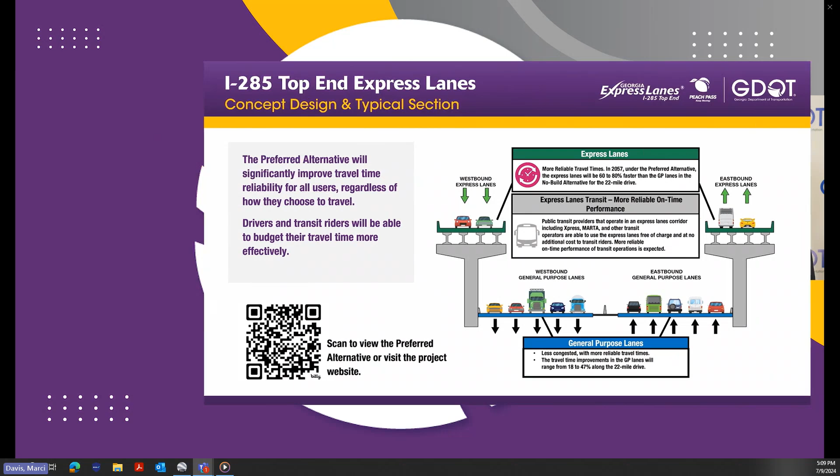As mentioned earlier, the proposed I-285 Top-End Express Lane is part of the MMIP portfolio and will be part of the Georgia Express Lanes network. However, express lanes on I-285 were being considered before the MMIP was announced as part of the Georgia DOT's Revive 285 initiative. Over the years, GDOT and its project team has engaged with local stakeholders and the public to demonstrate and showcase the proposed express lane project.

The project team hosted a community conversation meeting series in 2019, followed by the Public Information Open House series in 2020, conducted insights sessions with local stakeholders, community partners, and businesses, issued surveys for the project team, and have responded to meetings, requests, and public inquiries.

Following the close of the PHOH comment period, the project team will update the EIS document describing the project's potential environmental impact and include your comments and feedback in the EIS for final submittal. A record of decision, or ROD, is the final step to the EIS process and will be issued by FHWA announcing the selected alternative informed by public and agency input. Georgia DOT anticipates final EIS and ROD from FHWA in late 2025. Please keep in mind this date is subject to change.

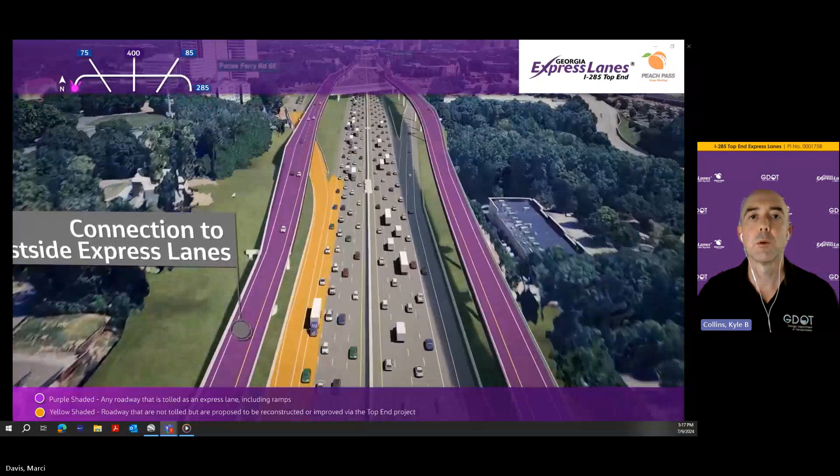What you're seeing here on the screen is a project visual rendering giving you, our citizens, the opportunity to imagine what this could look like and how traffic would flow once construction is complete.

You can view this video in its entirety at your leisure on the project website to specifically focus on your area of interest and track what your commute would be with the new concept if these lanes were built. Please keep in mind that this is still a preliminary design concept. It's not yet final, so all materials you see here are subject to change.

Okay, so as we start to have a few questions trickle in, I'm going to tag our air and noise expert first with GDOT, Miles Kemp, on a common interstate project concern. Miles, we're talking about noise barriers and what, if any, impact this project would have. I believe there's 30 some odd locations that may see some activity on noise mitigation. Could you take us through that process and maybe tour us around that virtual meeting room space as well?

Certainly, Kyle. Thank you, and good afternoon everyone. I'm Miles Kemp, the Air and Noise Section Manager with the Georgia Department of Transportation. First off, I'd like to take a little bit of time to talk about the process for completing noise assessments for projects such as the I-285 Top End Express Lanes project.

As part of the environmental studies that were completed for this project, a traffic noise analysis or noise impact assessment was conducted to determine the acoustic impact of the proposed project for noise-sensitive resources, such as single-family or multifamily residences, as well as public outdoor spaces all along the project corridor.

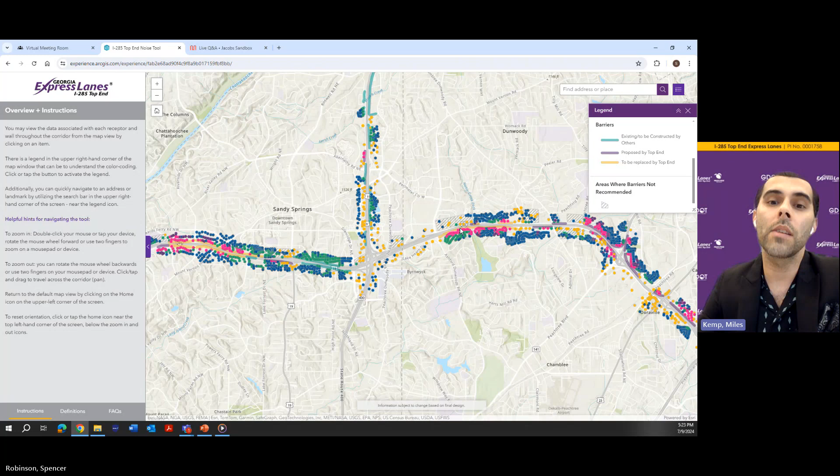But again, this information is subject to change based upon revisions to the project in the future. So if you have concerns about any particular areas, we highly recommend that you submit a comment and call attention to one of those areas.

So with that being said, I don't know that there's really too much more to go through regarding this. However, if you do click on any barriers, you'll generally see what the average height is currently expected to be. But again, it's all tentative and subject to future design revisions.

Appreciate it, Miles. That was a good detailed rundown of that process and the useful noise tool on the VMR that we talked about earlier. A few questions came in while Miles was giving us the run through. First, I'm going to kick this one to our environmental lead who works with Miles, Amber Phillips.

Question, comment: When you say the plans are subject to change, how is the community impacted by these changes notified? So far, communication has been more reactive than active, creating frustrations in our neighborhood.

Thank you for that question. As part of the PHOH effort, we will gather all the feedback we receive from this project and provide a response letter to all the comments we get. That feedback will also be incorporated into the final decision in the final EIS. As we make changes, there may be multiple ways we respond. If there's a change to a neighborhood, we may do stakeholder outreach to that neighborhood, or if you're on the project email list, we can update you with our newsletter, and updates will be posted on the project website. Thank you so much for the question.

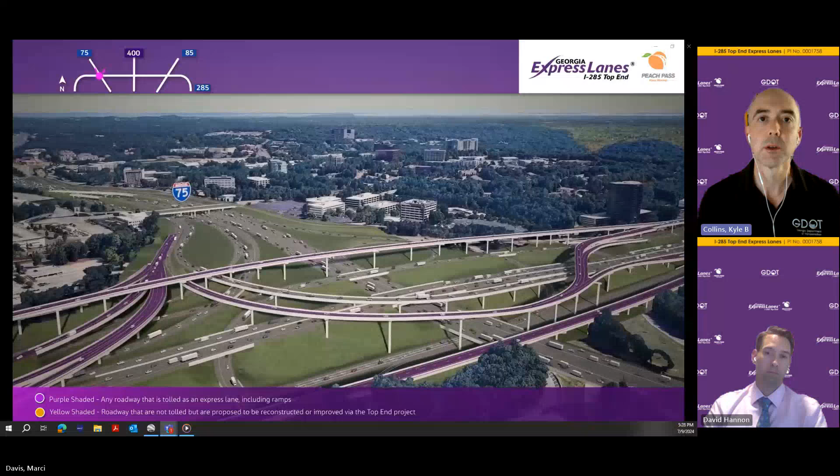Thank you, sir. And at the end of the day, customer service is going to be their main goal. Absolutely. So we're going to go back to Amber on the environmental front.

Amber, does the environmental impact statement address the dozens of trees that were removed for the new bridge at Mount Vernon? Has there been any commitment to replace the trees that were cut down for no apparent reason? The Mount Vernon project currently under construction is not part of this project, so our project does not cover that one.

But as far as this project, we don't specifically account for tree clearing. Tree clearing is done for multiple reasons, such as safety, if a tree falls on the interstate, things like that. However, as part of this process, we are also asking for the public's concerns with mitigation and impacts. If you could respond with different types of mitigation, we can look at whether those mitigations can be added to the project, and if not, we will let you know why we're unable to add them as the project progresses and the final EIS is approved. Thank you so much for the question.

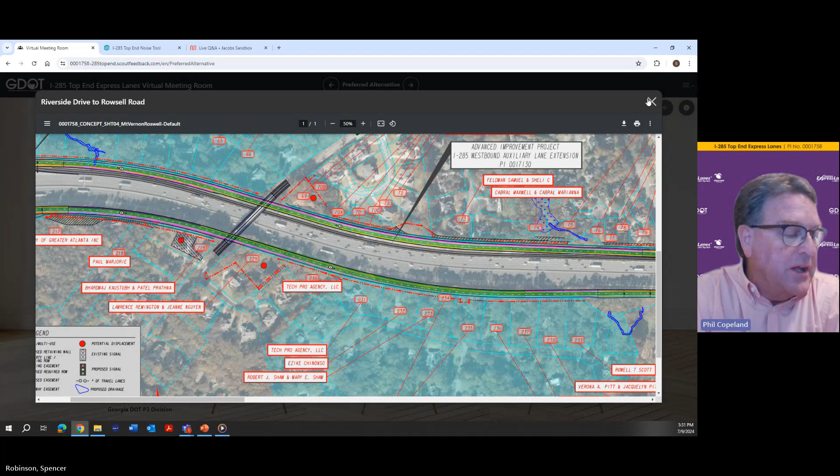Then if you go back to the stations along the top of the web page, you will see a GDOT resource station. Inside that station, there is also the opportunity for you to get an understanding of what the right-of-way acquisition process looks like, as far as the steps that we navigate.

Also on that same page is the right-of-way informational brochure that you can download, and you will see a more narrative version of what happens in each one of those steps, your engagement as the property owner, and the department's engagement with you on how that process takes place.

So again, I would encourage you to visit the concept layouts and then visit the right-of-way station to see the processes that are undertaken. Thank you, Kyle.

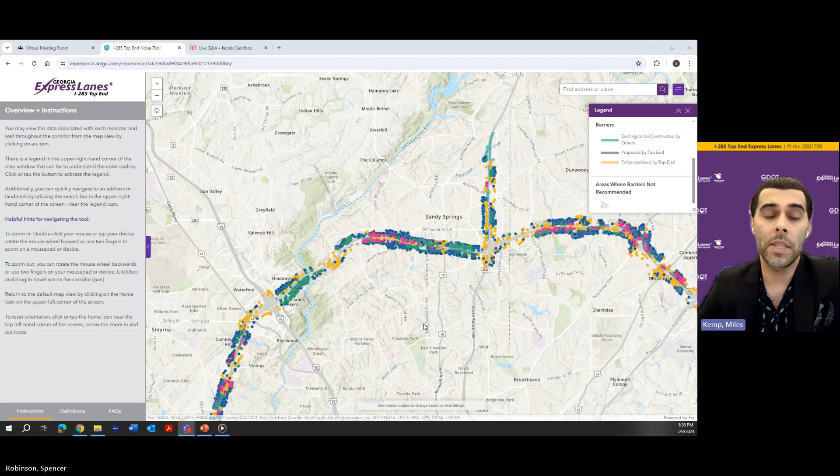Not that it's self-explanatory, but essentially what it's pointing out is that we have identified either constructability or maintenance concerns that are potentially precluding a barrier from meeting GDOT requirements or standards to safely construct a noise barrier. That could certainly be one reason. For this location in particular, we've identified a couple of major concerns, such as having inadequate space to actually install a noise barrier that might be ground mounted. Maybe we wouldn't put it on an existing or proposed structure, we would just install it into the earth. But there are standards and requirements associated with that, and if we can't meet those standards, we don't have a wall that could be safely constructed.

In some instances, we might have a wall that can be safely constructed, but there are limitations on what can actually safely be constructed. And if that's the case, we have to work within those limitations, and that might affect how well that barrier could perform. We do have minimum requirements under federal regulations as far as what sort of effectiveness or performance these barriers should be achieving in order to basically be required for consideration.

We can look further into that specific area. There's a lot to potentially talk about there. When we look at areas where we have conflicts like this and maybe some limitations we need to work within, we'll look at other alternatives. Like maybe there's an existing retaining wall out there that we need to consider mounting a barrier to. But under most circumstances, those existing structures are not designed to accommodate any additional weight or structure that might be mounted to it, so that could also be a very specific problem. Effectively, it means we have identified concerns that are not meeting our GDOT design standards, that are precluding us from saying a barrier can be constructed at that location based upon the current design of the project.

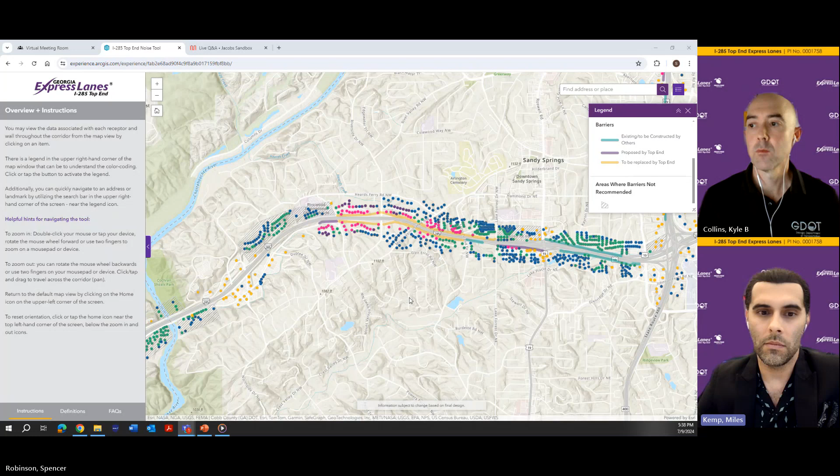And along that same line of the previous question, folks are still kind of curious what that means as far as sound mitigation. So the noise mitigation map says in some areas sound barriers are not recommended. We live along one of those areas - what does that mean and why?

Yeah, and that kind of varies from location to location. We tried to generally identify some of the reasoning for each of those locations where we're not currently recommending barriers, and it varies from location to location. If you want more details, we definitely recommend you reach out, leave a comment. Going through each of those on the virtual Q&A session can take a bit of time, but we can get back to you directly if you want more specific information about a specific location. We also have the full noise impact assessment and more detailed information that the noise study tool and those findings and figures are based on.

Those are all located on the project website. If you go to the homepage, on the project website there will be that environmental tab up at the top. You can click on that, scroll down to, I think it's Appendix 9, if I'm not mistaken. It'll actually be at the main 285 general hub page outside of the virtual meeting room.

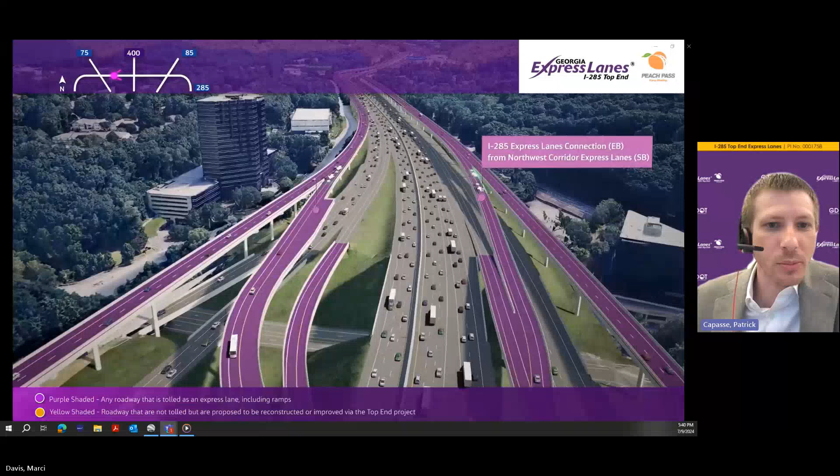Thanks, Kyle. It's awesome to have the opportunity to present this stuff to folks. So what we're looking at on the screen is a 3D rendering of the Express Lane project. Purple is the Express Lane project, anything in gray is basically what's out there today. The legend in the upper left depicts the overview of the whole corridor.

You've got the 75 interchange on the left and the I-85 interchange on the right, with 400 down the middle. That little purple dot indicates about where we are in the world as we're moving along the highway.

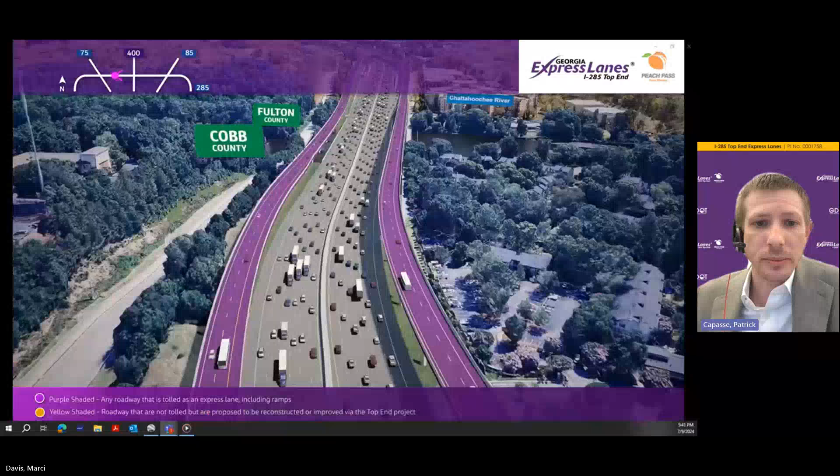So we're approaching the Chattahoochee River here. You'll notice that the express lanes are elevated in both directions, 2 lanes, and we have different access points throughout the corridor as we cross through this.

So you're coming up on an access point here that allows you to get into the express lanes in the eastbound direction or get out of the express lanes in the westbound direction. We call those direct merges, just some terminology for folks.

As we approach the Northside Drive interchange, this is going to go up and over that interchange. That's a separate existing interchange that's out there today. It's going to stay and remain in operation, but we'll just go up and over it with the express lanes.

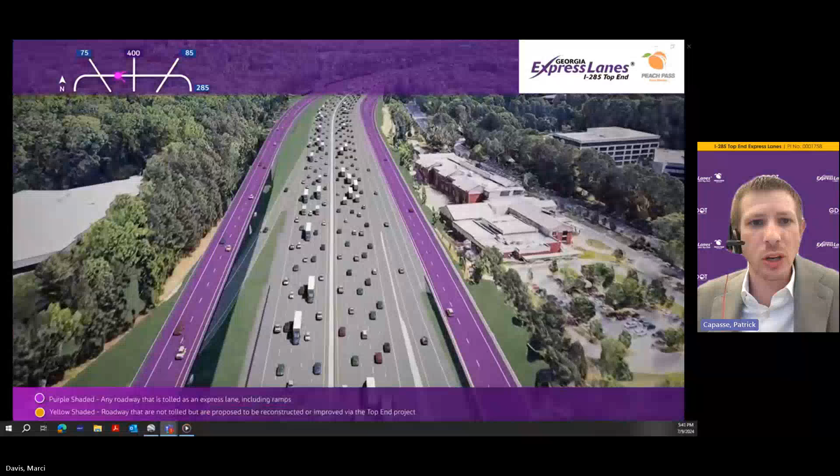As we keep going through here, we'll start to come back down to grade a bit. This is the other half, another direct merge that we're coming up on. Folks will be able to get out of the express lanes in the eastbound direction and get back into the general purpose lanes. They'll also be able to get into the express lanes heading westbound from the general purpose lanes. So we're at grade in this area before we go over the Raider Drive overpass at the top of your screen.

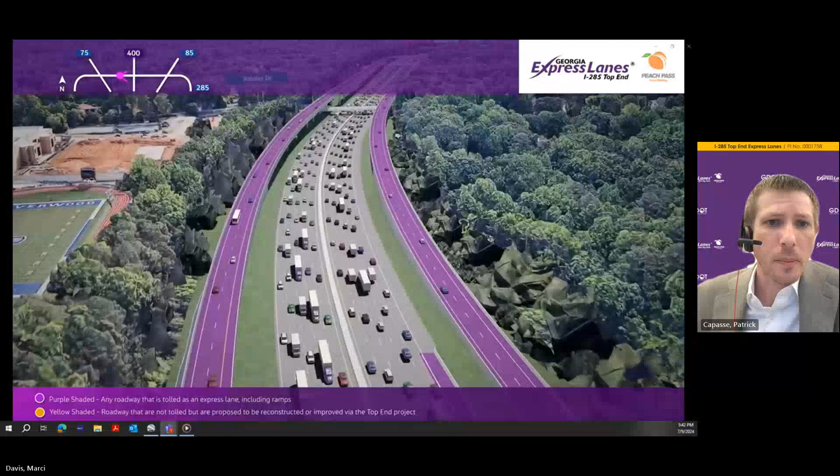And then we're about to approach the Riverside Drive area as well as the Roswell Road area. We'll go up and over those interchanges as well.

In this area, we'll go back underneath Mount Vernon. There is a project out there under construction right now - this is the 0017130 auxiliary lane project to replace the Mount Vernon Bridge. That bridge was replaced with the intention of allowing extra space for the express lanes to go underneath them. As soon as they go underneath that bridge, we'll head up again and head over towards the very complicated 285-400 interchange as we cross over Roswell Road.

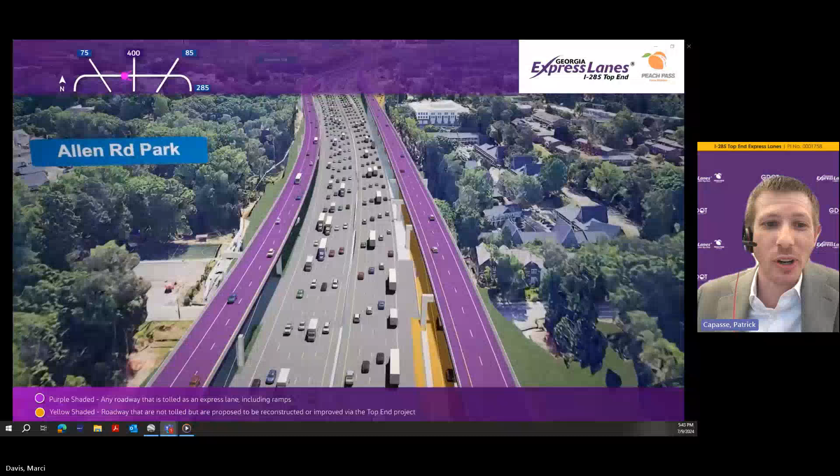On the left here is a notable park - this is Allen Road Park. We're anticipating no impacts to that park right now, so it's just a win for the project. We're able to completely stay off of it.

And then as we're approaching Roswell Road, these are the general purpose lanes that you see here on the screen. This is pretty reflective of what's just been constructed with the Transform 285-400 project that's out there today. They're just wrapping up that construction imminently, and the purple lanes will go basically in a space that's been preserved for the columns for the express lanes.

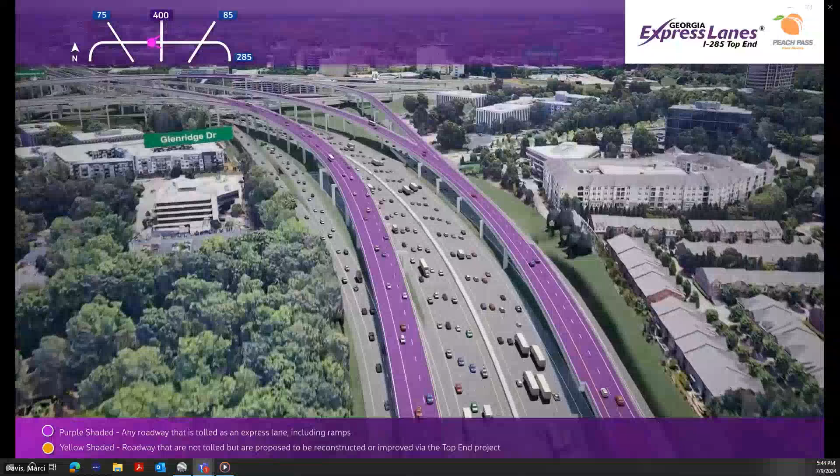And then as we make the turn as the approach to 285-400, we're looking south now. The camera's going to pan, look at Glenridge Drive. That bridge is proposed to be replaced with 2 egress and ingress ramps. We call them terminal ramps to the express lanes that will be on 400. Users will be able to get into the express lanes and head north.

So the camera's going to pan and turn, and we'll be able to follow it all the way up north as we tie into the 400 express lane projects.

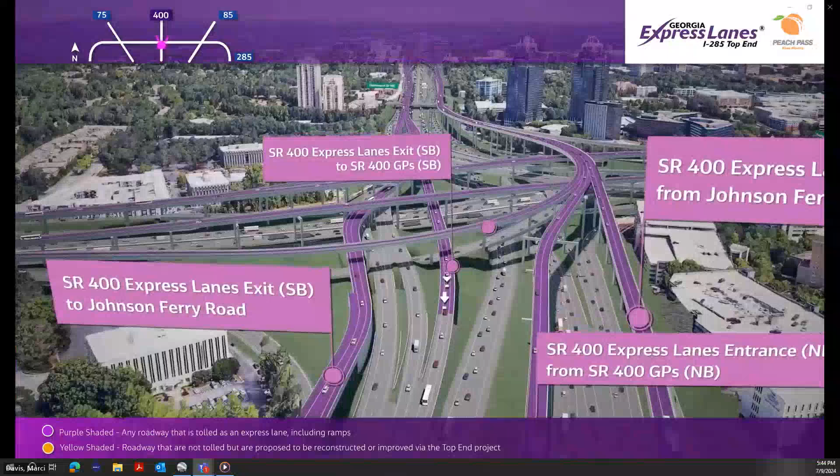Again, you'll see access roads to Johnson Ferry as well. On the right side of your screen, there's the entrance ramp heading north, as well as the southbound exit ramp to Johnson Ferry. Those are direct access ramps, or DARs, to get into the express lane system, and those only serve 400.

And we're heading north now, past the King and Queen building on the right, and up and over Hammond Drive.

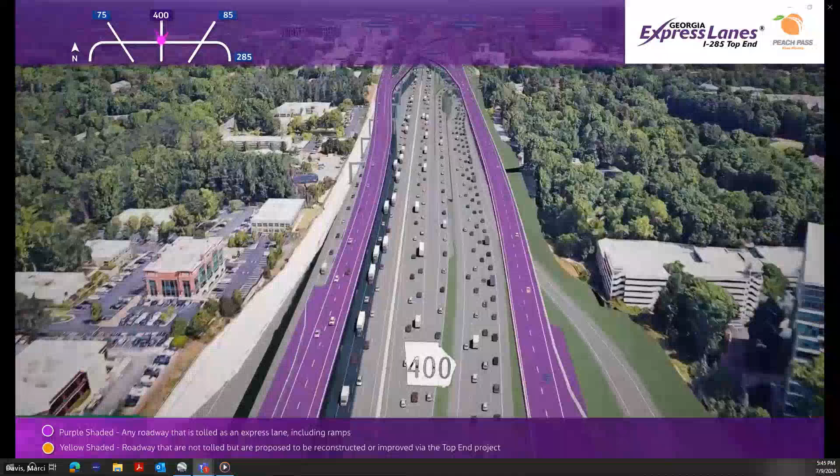Now we're approaching Mount Vernon interchange, another direct access ramp that serves the local network. Users will be able to get in at Mount Vernon and head south. Then we're just about at the northern terminus on 400, where we tie into the express lane, the 400 express lane project. That project's not shown on these graphics, but the two projects do tie together right around the North Springs MARTA station.

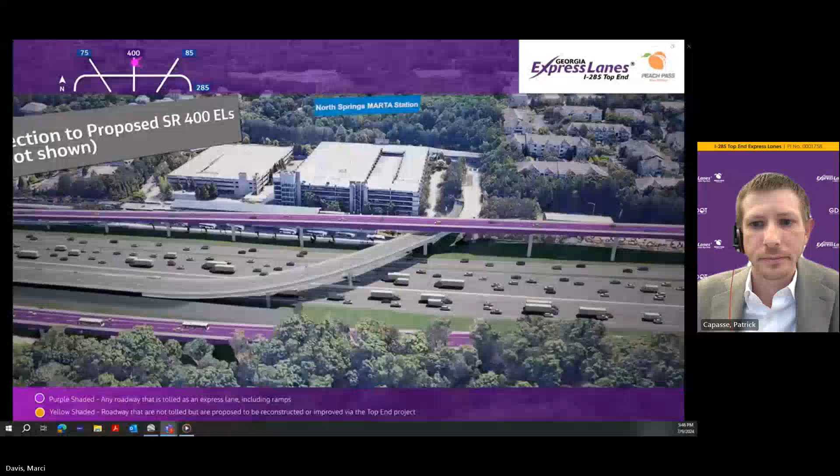While we're going through this video, Patrick, a question came in related to the elevated lanes and the height. What is the approximate height of the elevated lane between Riverside and Powers Ferry? It doesn't seem like a sound barrier. The proposed 30 feet would do much to dampen sound for a lane that appears to be close to 30 feet in elevation. Well, that's an excellent question.

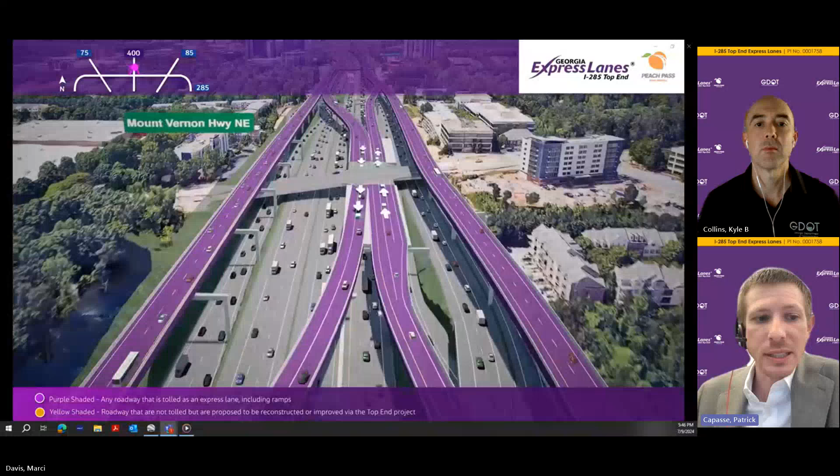As the video showed, we're about 50 to 60 feet above the existing general purpose lane elevation because we're going over Riverside. But we actually get more abatement by putting a ground mounted barrier to protect against the noise that's generated from the general purpose lanes. 18-wheelers will not be allowed in the express lanes, so the noise is significantly less, but we get more abatement and better benefit by putting a ground mounted sound or noise barrier to protect against noise.

Awesome. Thank you for that.

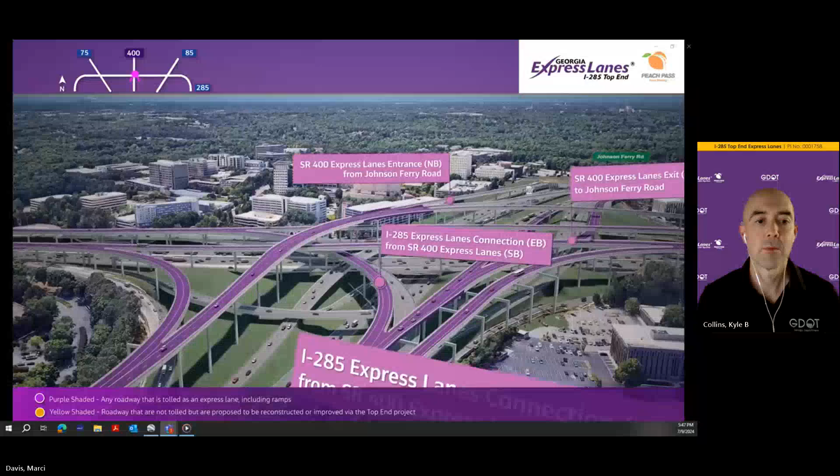So a few more questions that have come in. I'm actually going to answer this one. What's the PI or project information number for the express lanes on 400 outside of 285? Well, that particular PI is 0001757. So you may have heard some discussion of the planned express lanes up north in the 400 corridor from basically where this project leaves off heading into Forsyth County.

That's currently in active procurement. We've actually just opened 3 bridges in advance of that project as well, delivering some local road improvements to City of Sandy Springs with 2 bridges at Roberts Drive and Pitts Road, and also up in Alpharetta. So those have gone well, multimodal aspects tying into aesthetic packages with both of those local governments. We've had a good working relationship with them, and that's some good positive, on schedule or ahead of schedule openings that we've recently had.

Georgia DOT Project Manager for the P3 Division. I am glad that you could join us today to learn more about the proposed I-285 Top-End Express Lane project, PI number 0001758. Let's get started with today's presentation ahead of our virtual question and answer session.

The northern half of I-285 is one of the most heavily traveled and congested interstate highways in the United States. More than 240,000 vehicles travel across this stretch of highway every weekday. The proposed I-285 Top-End Express Lane project is part of a larger effort to improve traffic flow and provide reliable trip times on our Metro Atlanta interstates.

Instead of continuing to build general purpose lanes that will continue to fill up with vehicles, the Atlanta Regional Commission and our State Transportation Board adopted express lanes as a solution to manage congestion in Metro Atlanta and to provide reliable trip times as more people and businesses move to the region.

Express lanes are optional, price-managed lanes that complement the existing interstate in some of the most congested corridors around Metro Atlanta. You don't have to use them, but motorists and transit customers can take advantage of the lanes to bypass congestion for a free-flowing trip.

And that's right, I said it, transit customers. Georgia express lanes are considered transit lanes, supporting opportunities for existing transit services and inclusion of new transit opportunities along the I-285 corridor. Express Lane Transit, or ELT, allows public transit providers that operate in these corridors, including Xpress, MARTA, and state-registered van pools, to use the express lanes free of charge.

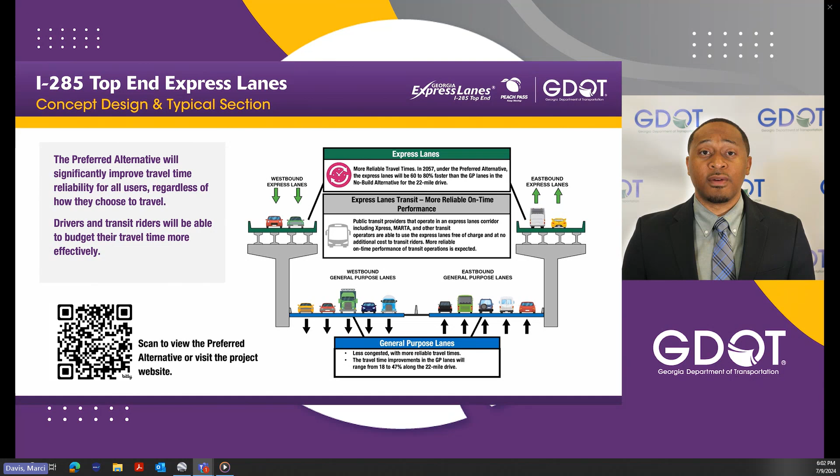As mentioned earlier, the proposed I-285 Top-End Express Lane is part of the MMIP portfolio and will be part of the Georgia Express Lanes network.

However, express lanes on I-285 were being considered before the MMIP was announced, as part of the Georgia DOT's Revive 285 initiative. Over the years, GDOT and its project team has engaged with local stakeholders and the public to demonstrate and showcase the proposed express lane project.

The project team hosted a community conversation meeting series in 2019, followed by the public information open house series in 2020, conducted insight sessions with local stakeholders, community partners, and businesses, issued surveys for the project team, and have responded to meetings, requests, and public inquiries.

Following the close of the PHOH comment period, the project team will update the EIS document describing the project's potential environmental impact and include your comments and feedback in the EIS for final submittal.

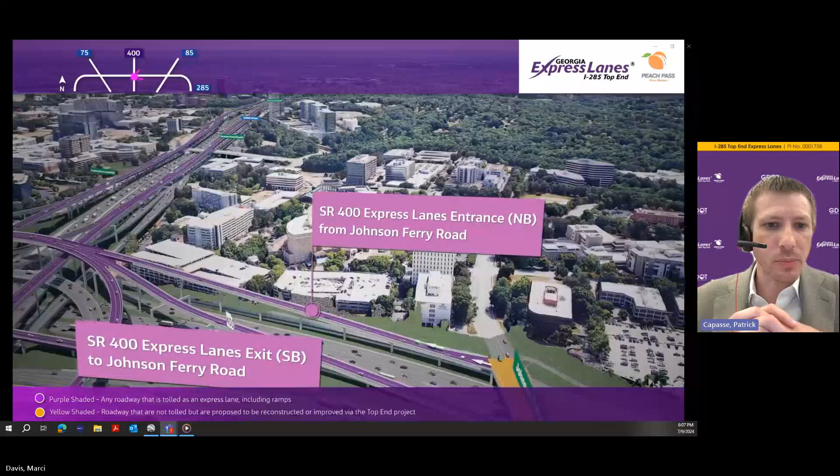We're heading, looking towards the east here. We're just above the Johnson Ferry access point, and you see those two direct access ramps in the lower part of your screen connecting to Johnson Ferry. Then you'll also see in the middle of the screen there's a lane heading northbound that'll get you into the express lanes from the general purpose lanes on 400, as well as an egress from the express lane system back to SR 400 southbound.

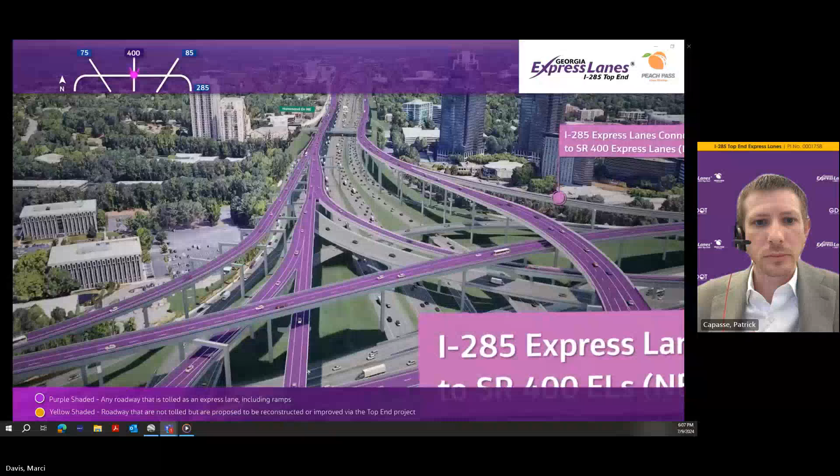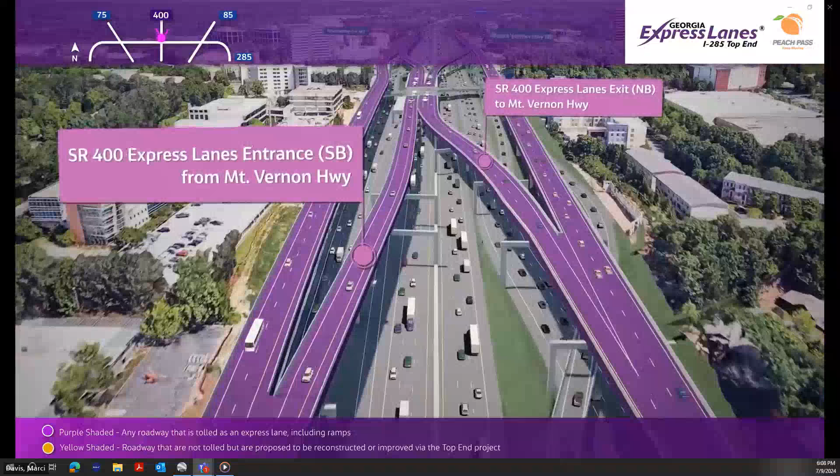As the video was pulling up, we just still didn't anticipate 400 to be widened any further than it was already widened under the Transform 285-400 project. So all of the columns you see, all of the straddle bents and the elevated lanes, will be built on existing right-of-way, sort of shoehorned within the median.

And then Kyle, we'll keep letting this play for a little while, and we'll head towards the eastern part of the project as it comes back down south from the top.

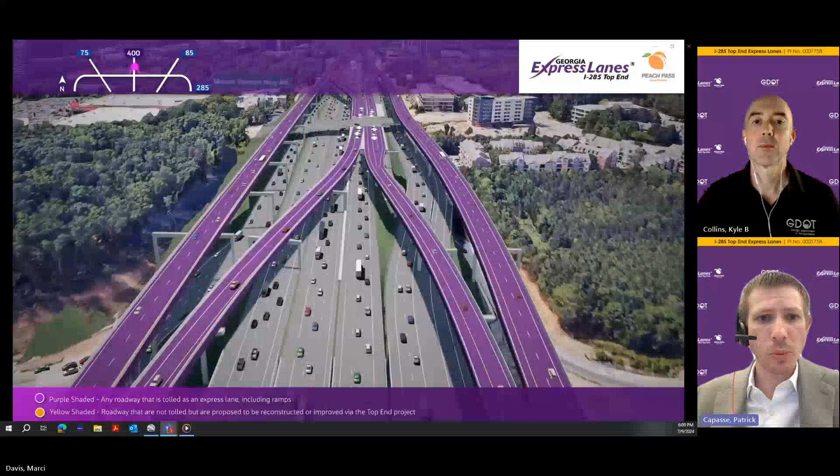Now we're heading south, so cameras turned 180 degrees, and we're heading back south now towards 285-400, towards that interchange. Again, approaching here is the Mount Vernon interchange, the new proposed access point there. As we head south, the camera will turn and pan to the west, then the east, as we go around the King and Queen building.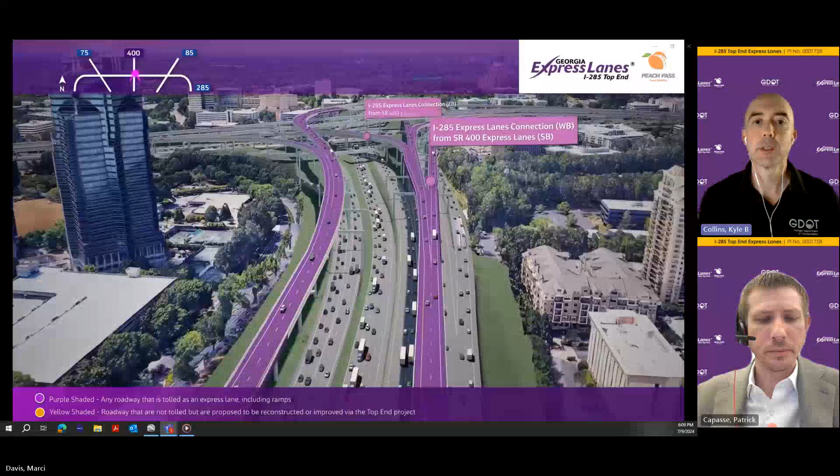And Patrick, while we're going through this, one of the questions was on the noise front. Folks see these proposed elevated express lanes in both directions. The question was, do I understand you correctly when you state there will be no noise abatement for elevated roads? We may bring in Miles on this too, but wanted to give you first crack at it.

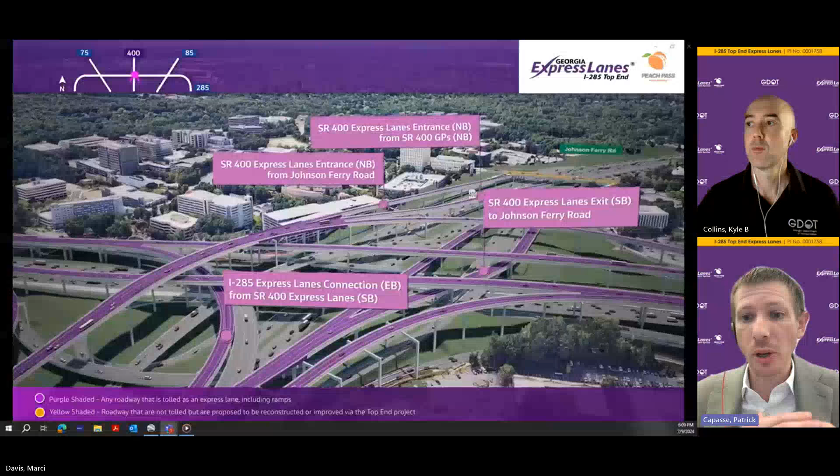No, I think that's a great question. We do get more abatement, as we studied it, from putting a ground mounted barrier. That doesn't mean you can't put a noise barrier on the elevated lanes - it just means we actually get more benefit by mounting them on the ground. Miles can talk a little bit more about that process and how we've analyzed it, but that's generally what our studies are showing.

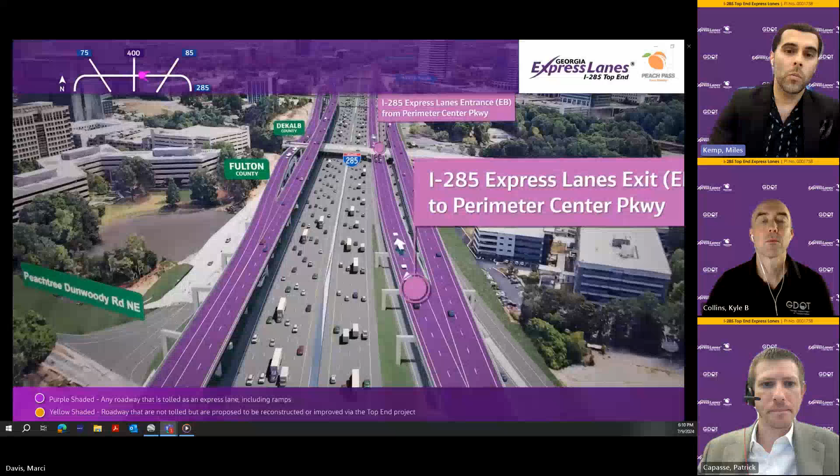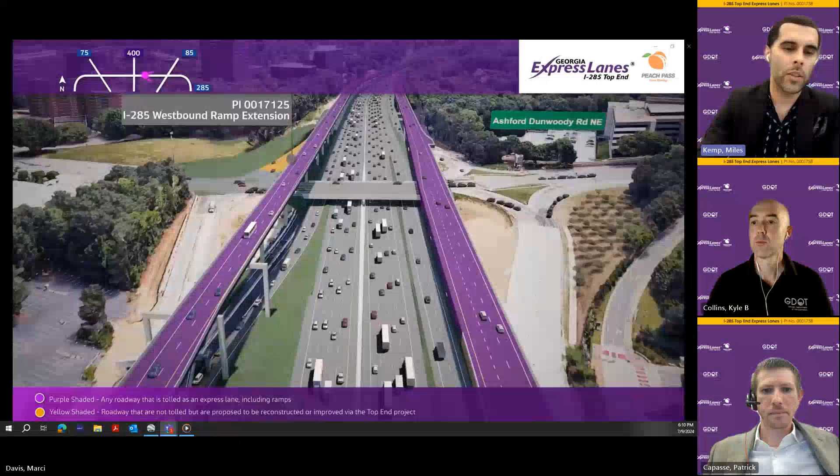Thanks, Patrick. I'm happy to jump in there and expand on that a little bit. The modeling completed for the project included the elevated express lanes and additional things that might affect how traffic noise is emanating both from existing I-285 and those elevated express lanes. Part of that was consideration of whether those elevated express lanes have a direct line of sight to adjacent noise sensitive properties like residences. And part of it, what we looked at early on, was the currently expected design for those express lanes and the kind of sidewalls that would likely be included along the sides, which in some way is contributing to some reduction or blockage of that line of sight to those nearby noise sensitive properties.

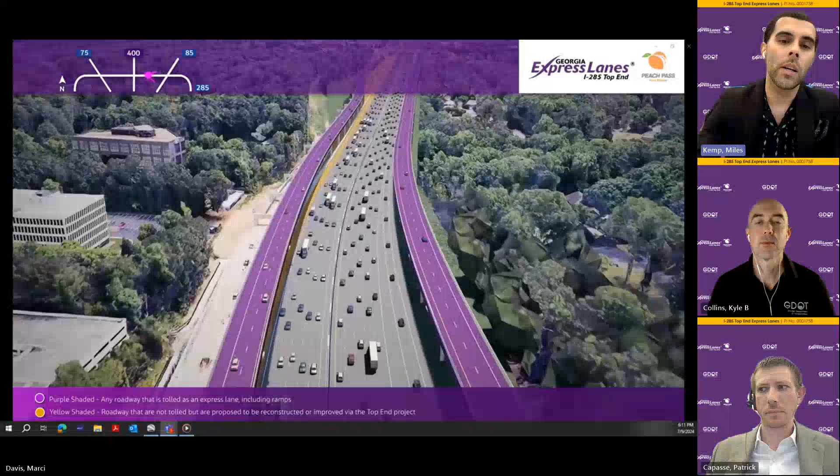So really, if we were to propose noise barriers on those express lanes, there would be very limited, if any, reduction contributed from the elevated express lane. That's also going to see less capacity compared to existing I-285 - you can see that on the screen here, with many more lanes, as well as more restricted access. So we wouldn't be having heavy trucks, like big shipping trucks, on those express lanes, and noise could come from exhaust stacks on particular heavy trucks, so that's a factor too.

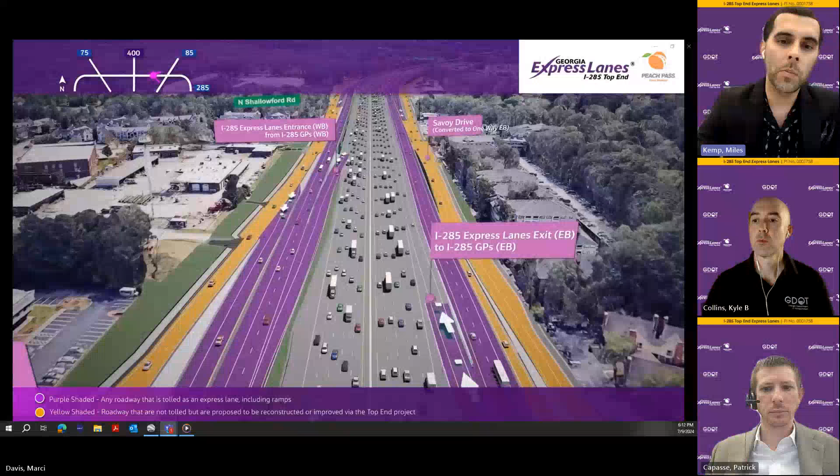So with that limitation taking away some of that noise from the elevated express lanes, largely you have the chief noise source being existing I-285, and ramps and whatnot. So we really do get the most bang for our buck as far as reducing traffic noise effectively by putting those noise barriers along the ground mounted sections. I just want to reiterate that if we were to look at those in concert with barriers along the elevated express lanes, there really wouldn't be much, if any, additional reduction achieved.

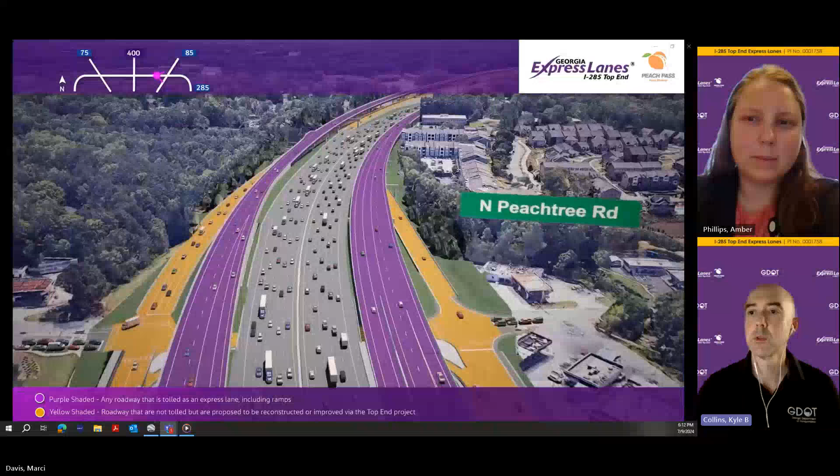Thanks for that, Miles. So while we're still running this visual video, which is available on the website - make sure y'all check it out if you haven't already - we're going to go speak on additional environmental topics. So we're going to get Amber back up for this one. Amber, I've actually got a back-to-back for you, so don't go anywhere.

The visualizations show the proposed roads right next to existing trees. I assume that's not actually going to happen. How many feet of trees will need to be cut back for the lanes to be constructed? Is there a visualization that shows what trees are expected to be cut? Yeah, that's a good question.

Yes, this video is an artistic rendering, so it is not necessarily exact of what may occur in the field or what you may actually see from any specific vantage point.

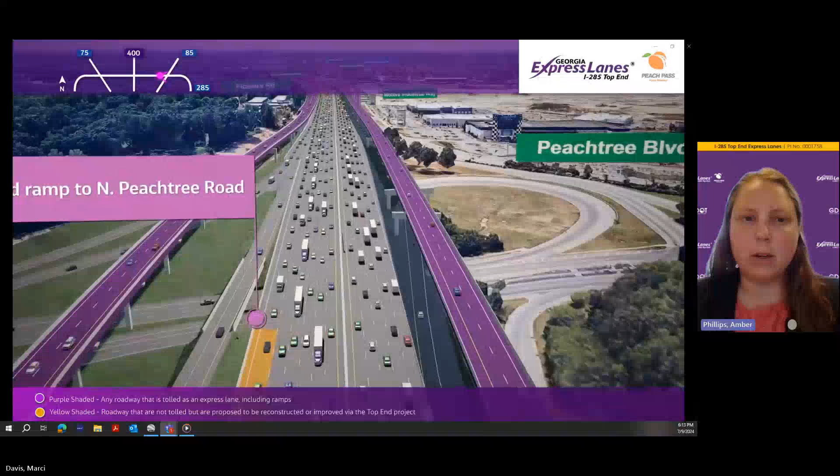Tree clearing will be done within the existing and required right-of-way and any easements we have to obtain as part of this project. The final design will be based upon that. Right now we're in preliminary design, so those impacts are not currently estimated, but it will be within our existing and proposed right-of-way. We've acknowledged in the draft environmental impact statement that there will be visual effects associated with this project, both from tree clearing and the new lanes being proposed.

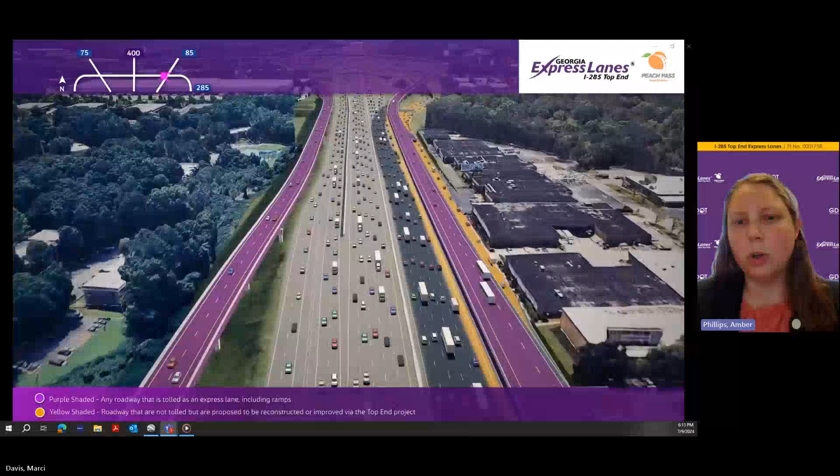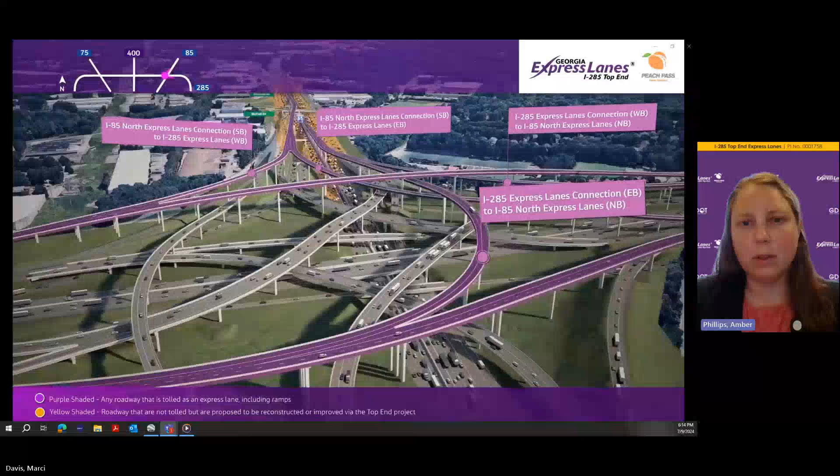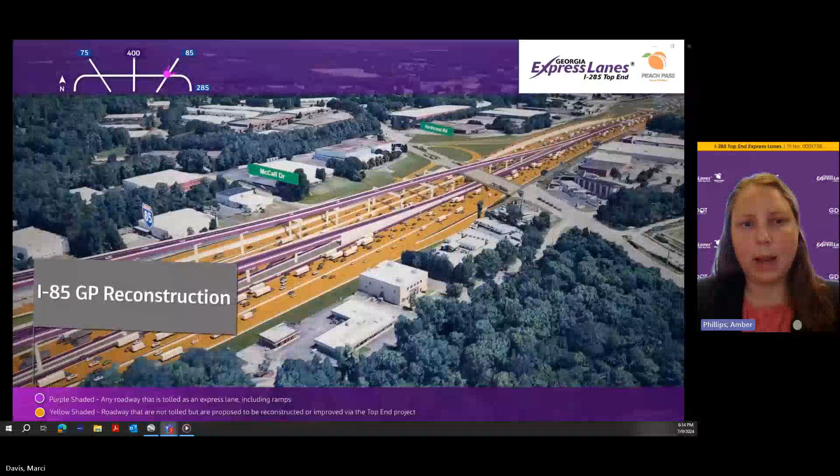We understand that things like this are important to the community at large, and we're seeking your input on mitigation measures as part of this hearing process. We'll gather that feedback, and we're going to be going out to some mitigation meetings within the community, so look for those after this hearing series. We'll work with Federal Highway and look at what mitigations we can provide, then finalize the final EIS and ROD, which will publish what we were and weren't able to obtain. So if you have visual ideas for mitigation that are important to you, please provide those comments and feedback for us to take into consideration.

As a general rule, it's expected that 15 to 20 feet of tree clearance is typical beyond the express lanes, for driver safety and constructability when the project is constructed. Of course, there could be locations, depending on design elements, that may need different requirements from that.

Awesome, so next one on that front, and maybe on this visual video, if we could scoot it back to the start, toward that 75 end, because this one pertains to the Chattahoochee River. How will this project impact the portion that crosses over the Chattahoochee River?

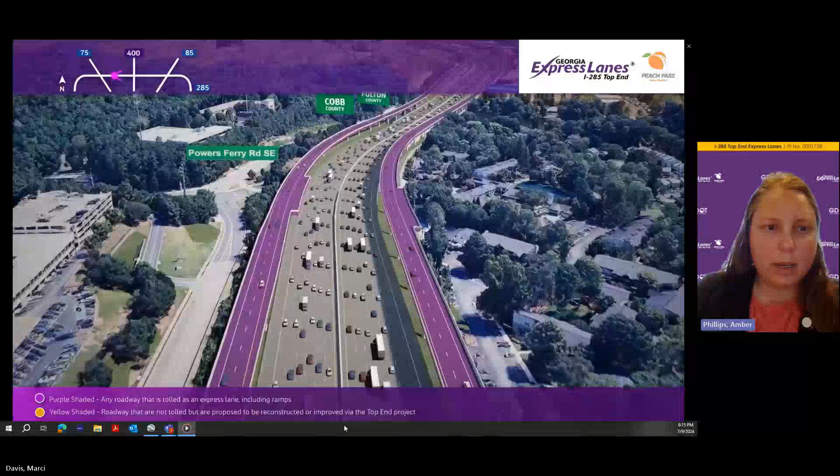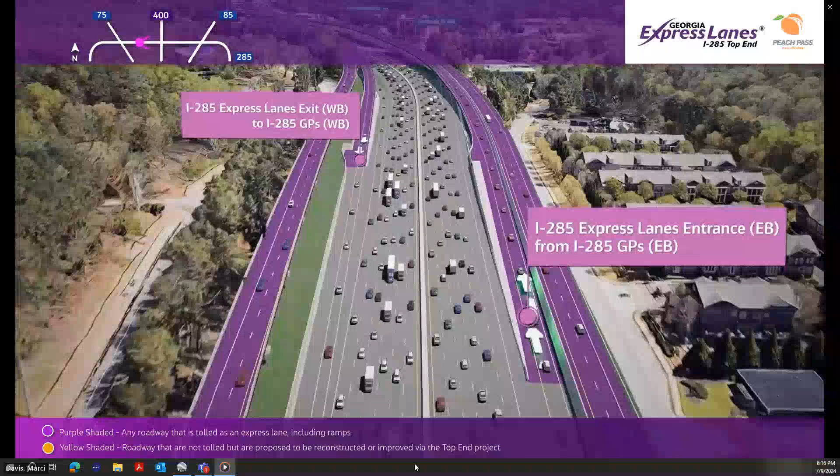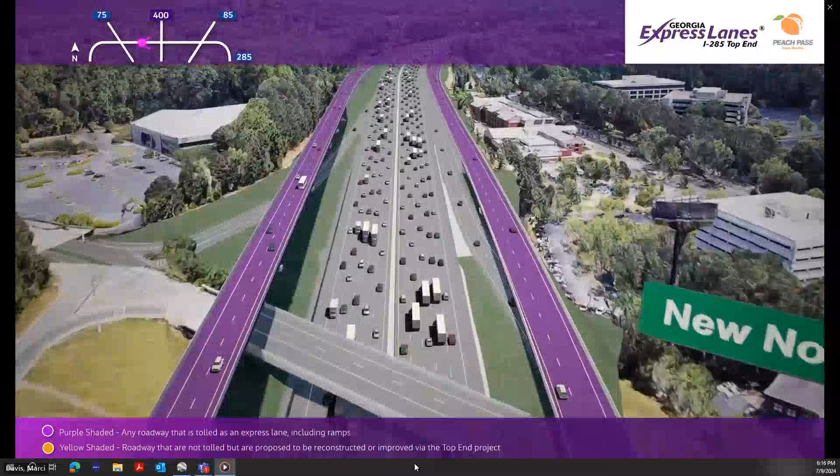Construction would require the temporary closure of half of the river at a time for short durations. The idea is that construction would preserve passage via the Chattahoochee River, as one side will remain passable at all times, except for short durations when overhead construction would pose a safety concern. We are in continuous coordination with the National Park Service and the Chattahoochee River National Recreation Area to work on these impacts and ensure construction impacts are minimal, and that recreational use of the river is preserved as much as feasible and safety conditions allow.

Thank you so much for that question.

Thanks, Amber. So this next one, we're going to go to project management, we're going to get Xavier in here. This one is related to transit. Folks have seen a lot of promotions and news, Xavier, about some of the collaboration we've had with cities and counties in this corridor and multiple agencies trying to deliver a transit component to this. Can you talk about that generally, and also, why is GDOT building these lanes rather than building more transit specifically?

Yes, thank you, Kyle. Traditionally, funding for transit projects comes from the Federal Transit Administration and local funding, and currently there is no sufficient funding for heavy rail transit as our solution for I-285. But Georgia Department of Transportation is collaboratively working with the region's transit operators and planning agencies through the ongoing study for transit within the I-285 express lanes.

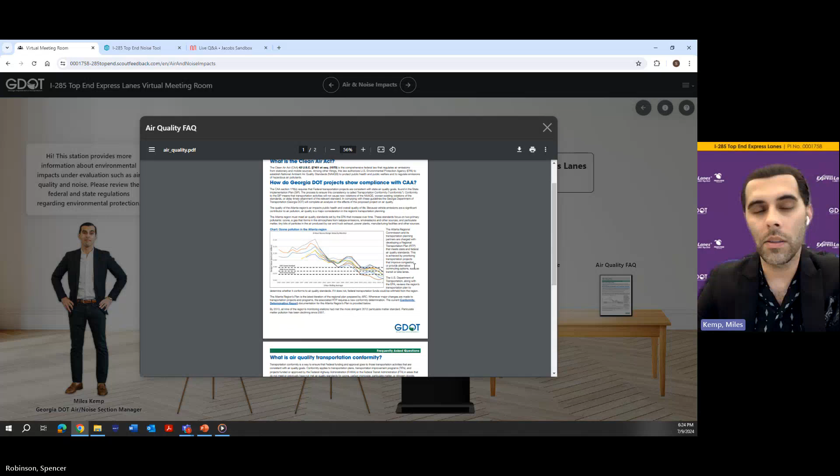But overall, our analyses are conducted according to EPA regulations, as well as federal regulations under the National Environmental Policy Act, or NEPA. Again, a big component of that is comparison of existing levels to future levels, both with and without the project.

More information can be found in the air quality impact assessment located on our project website under the draft environmental impact statement. I believe it's one of the appendices for that project. I'm not sure offhand which one, but I highly recommend you take a look and check out the findings for the air quality impact assessment. If you have any additional concerns that I haven't addressed, we absolutely encourage you to leave a comment.

On the project website, using all the different means and methods that Kyle outlined earlier. I know we did this in our initial kickoff when we started the Q&A session, but could we bring back up that noise tool and walk folks through it, maybe for those who joined after the start of the meeting, Miles?

Yeah, certainly. If we can get that back up on the screen, I'd be happy to talk about the navigation of it and some of the legend items, because there's a lot going on there. It's a really handy resource. Basically, if you have access to that project website, you go to the VMR, the virtual meeting room, and then to the air and noise impact section, you'll quickly find, I guess this is the center item there, the noise tool.

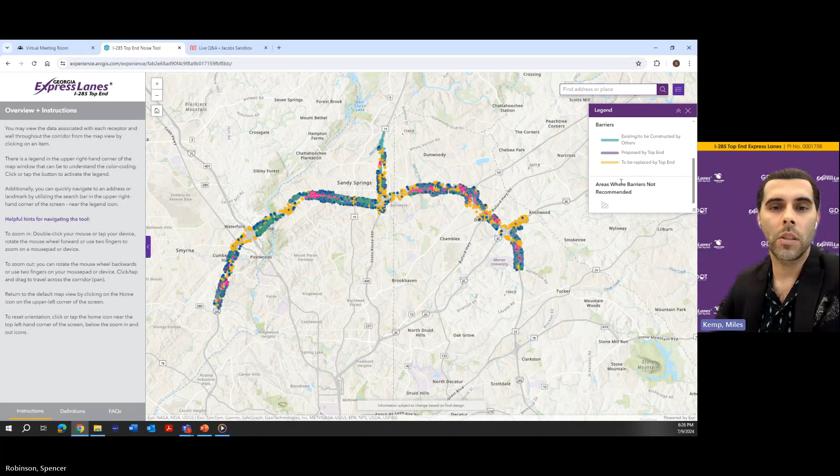Really, the way this works is that it's based on preliminary information, so these findings are subject to change based upon design refinements in the future. But if you want to find the information for a specific area, I'd highly encourage that you type in an address in that top right corner. It functions like a Google Maps search function. You put in your address, hit search, and it should come up with something it thinks you're searching for. Click on that when it drops down, and it should zoom you into the general area where your address might be located.

With that, you'll see a lot of these little dots, which we can call receptors. Those represent various locations that were included in the noise impact assessment. With those different colors of receptors, you'll see whether or not certain locations were projected to qualify as impacted by traffic noise, per the findings of our noise impact assessment. I want to remind everybody that this considers not only existing I-285, but also the effects and contributions from the proposed project design, i.e. the elevated express lanes and any other improvements. So this is looking at the big picture and overall effects of this proposed project.

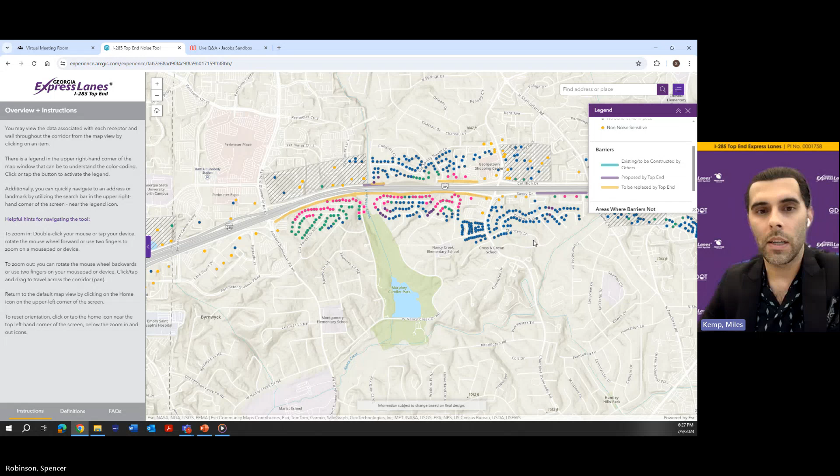You'll see different colors that indicate whether or not you're expected to experience a traffic noise impact in the future, and whether barriers might be proposed if you qualify as benefited by a noise barrier. While we're on the topic of noise barriers, you'll see a number of different colors that highlight existing noise barriers that the project is not expected to disturb, additional ones that we currently expect will require removal and then replacement. Again, generally in the same area, but we do have requirements for barrier effectiveness, so we have targets to make sure they're potentially reducing traffic noise for the condition this project is part of.

There are other locations where new noise barriers are being proposed. There may not be anything out there currently. Maybe there were new developments that came along prior to previous projects that generated the other existing noise barriers. But in any case, we might have new locations where noise barriers are being proposed, and I think we have about 15 of them or so.

Again, a lot of that information can be found back in the VMR, the virtual meeting room - there's a flyer about that. But if you want to look at it, you can click on those noise barriers too and see generally what those average heights are. It specifies what impact area or grouping of impacted properties or resources it's essentially associated with, which ties back to the noise assessment document located on the general project webpage.

We also have areas where noise barriers were assessed. We had impacts projected for those areas, and for one reason or another, such as constructability issues - like we can't realistically construct a barrier there based upon GDOT design standards - or maybe it's simply not effective at reducing traffic noise for that area.

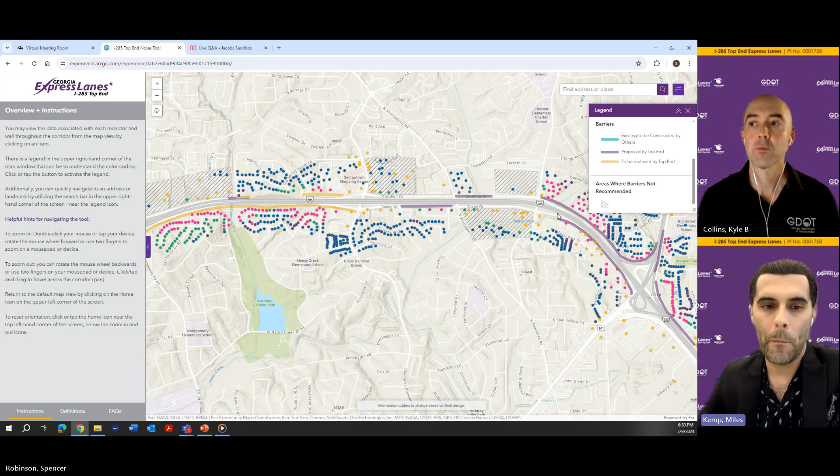Thank you, Miles. So we got another one for you on the noise front. More benefit from ground-mounted noise abatement does not necessarily mean that noise from the elevated roads is abated. Can you quantify, explain the estimated increase in noise as a result of adding elevated roadways?

Yeah, certainly. I can't give you hard numbers right at this moment, but when we talk about what is abated or mitigated, we do have requirements for what is considered to be an effective noise barrier or form of noise mitigation, noise abatement. That's outlined in our noise policy, which is interpreted or set based upon the Federal Highway Administration's noise regulations. It's 23 CFR, Part 772, if you're interested in searching that out on the web.

But in any case, it does outline some minimum thresholds for what could be considered an effective noise barrier at the very least. And if it's not achieving a minimum threshold, then we can't propose it or recommend it for construction as a noise barrier, because it's not performing.

So for the purpose of calling back to existing I-285 versus the elevated express lane, we have a big disparity in the traffic volumes and thus the traffic noise that is tied to those two express lanes that might be on the outside of I-285 on both sides, compared to, in most sections, like 10 lanes of traffic along just general purpose I-285, existing I-285.

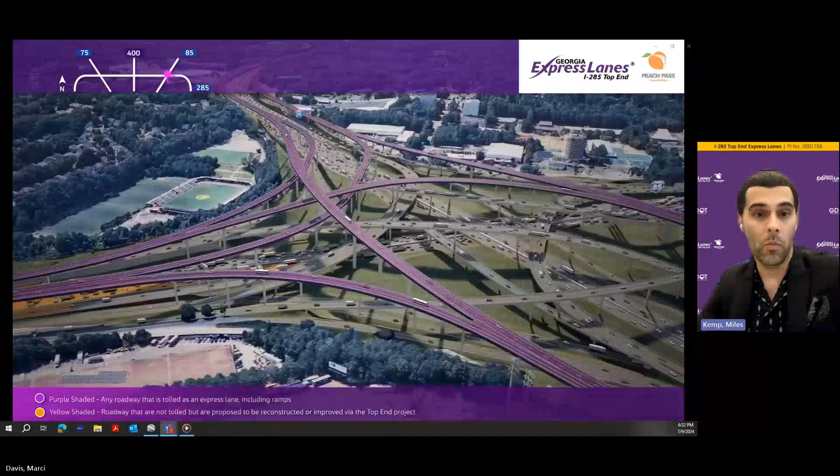I do want to reiterate that as part of our analysis, we did need to consider the location of these elevated express lanes. They are elevated in most sections, such as the interchange we're looking at right here for 285 and 85. That does play a role in the traffic noise location in relation to whether or not noise sensitive properties adjacent to those elevated express lanes have a direct line of sight.

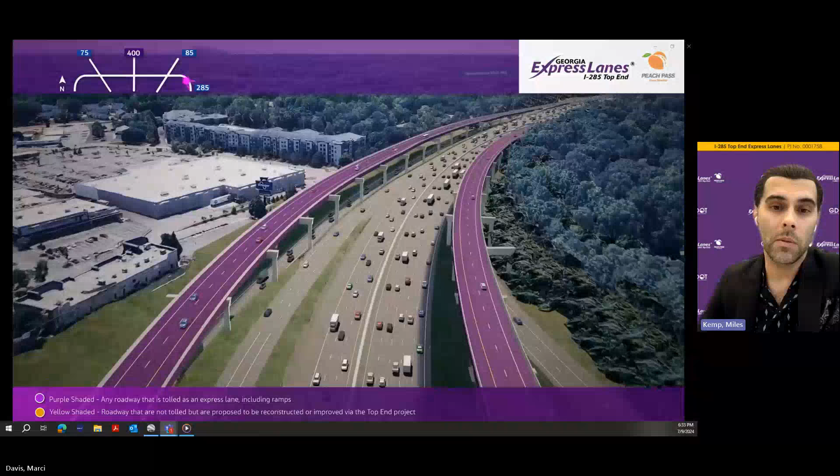So some of that noise might pass right over properties that are directly adjacent. And certainly the further you are away from the road, the benefit of these noise barriers does diminish somewhat. They're generally going to be considered for resources that are directly adjacent to the interstate. We have limited ability to really reduce traffic noise beyond a certain distance from the roadway.

I also want to point out that those noise barriers are not proposed or expected to just cut out all the traffic noise. They can reduce it by a certain amount to be considered effective, but they can't just eliminate all of the traffic noise out there. But again, the barriers along I-285 are generally meant to reduce the traffic noise from the chief noise source, which is existing I-285.

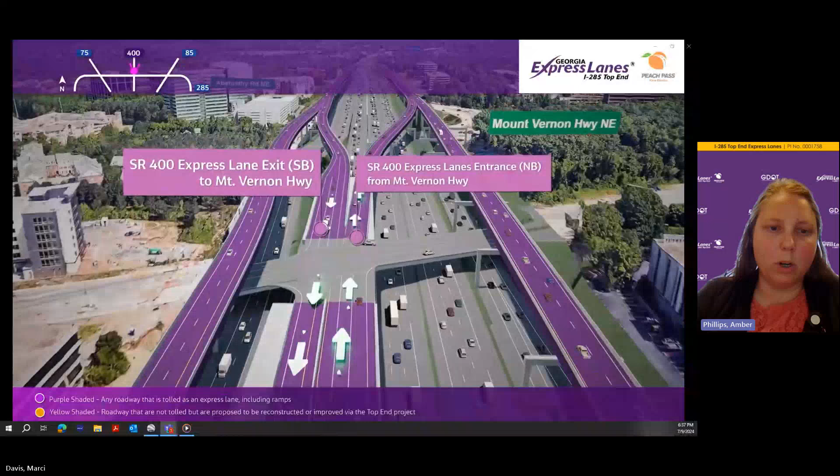The express lanes on I-285 would support existing and future bus transit options. Public transit providers that may operate in this corridor and state registered van pools will be able to use the express lanes free of charge. Transit and registered van pool riders will only need to pay their standard transit rider fee. Georgia DOT is collaborating with ATL, MARTA, ARC, and the 4 metro Atlanta counties to advance express lane transit, to create more regional connectivity and expand transit operations in the metro region. So we're all partnering together to address this and address the travel needs of the public.

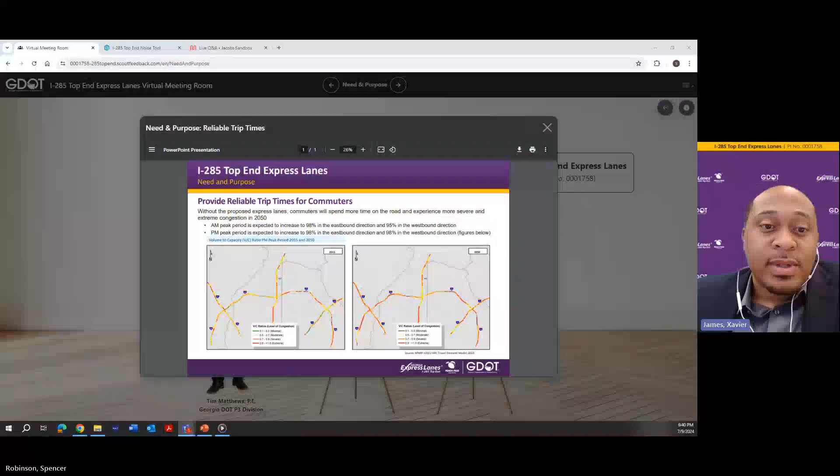Thanks, Kyle. Construction activities will require temporary lane and road closures and would likely result in some commuter delays. Although GDOT looks to minimize traffic impacts and interruptions to the traveling public, safety is also a major factor while construction is underway. Where lane closures, road closures, detours, and traffic shifts are required during construction, GDOT traffic control standards will be followed and information will be communicated in advance to the traveling public.

A traffic management plan will be prepared during final design. This plan will determine how to best accommodate travel and safety needs during construction, and will identify strategies to manage work zone impacts. A public involvement and communication plan will also be prepared during final design, identifying strategies and methods for sharing construction-related information with residents, businesses, and travelers.

Thanks, Xavier. So we've got a request that came in just to show the Paces Ferry Cumberland section of this project, so we'll get that video pulled back up. I may tag in Patrick too to get him to describe that general area.

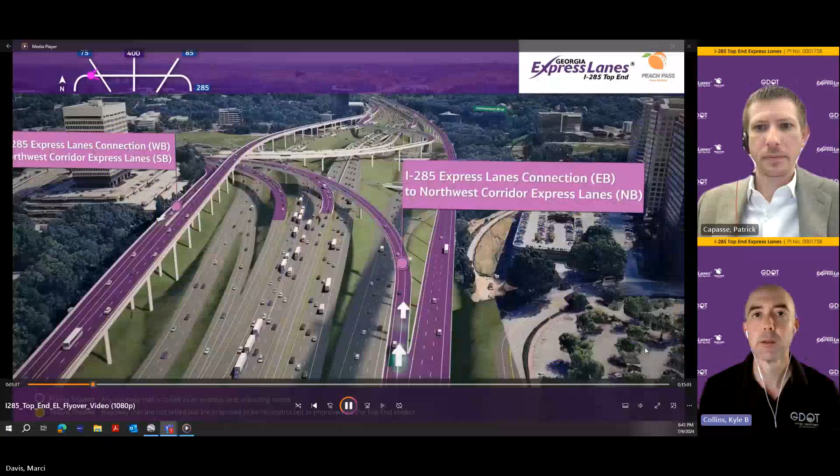Once you begin the video in the virtual meeting room, it's going to start on the 75 end, kind of that South Atlanta Road side, and then meander towards 400, 85, ending on the scope of this project at Henderson Road, plus the 3 miles on 400. Maybe we could get it to that particular part, and we'll let Patrick add any extra details he thinks would be of interest.

Yeah, we're just east of that area right now. So if we can slide the video back towards the very beginning, we'll be near the close spot. But essentially, there's going to be an entrance ramp right into the general purpose lanes.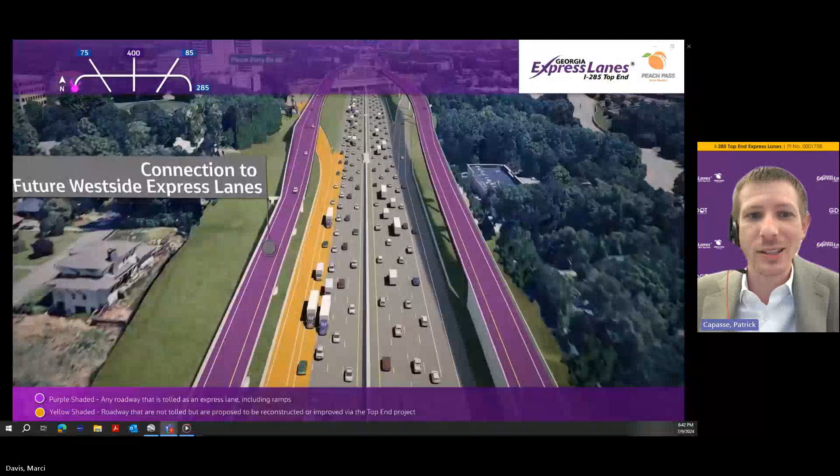It's up on the screen here. So the egress right under Orchard Road allows you into the express lanes on the right side of your screen, with a terminal ramp heading in the opposite direction on the left side that gets you back into the general purpose lanes. The orange you see here on the left is really just some reconstruction of the existing on-ramp from Paces Ferry, to accommodate the express lanes.

Express lanes will go up and over Paces Ferry, staying on the outside through the Cumberland area. There's a future connection for a future access point at Mount Wilkinson that the West Side Express Lane project would propose. That's not being constructed as part of Top End, but that will happen under a future phase.

Approaching Cumberland Boulevard here, this is a half diamond, so this is sort of the eastern half of the access point that is a sister access point to the one I just mentioned a minute ago. At this point, you'll have ramps that go into the express lanes connecting to Cumberland Boulevard. You'll see the Battery up on the left, the Braves Stadium.

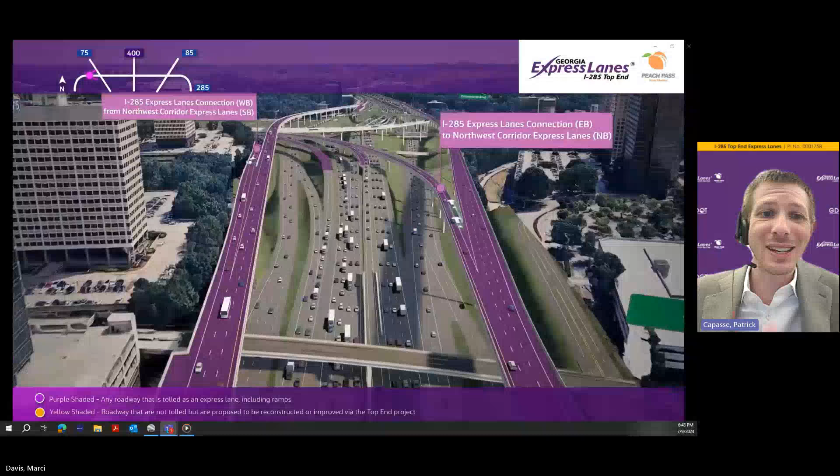As we're approaching the Northwest Corridor here, there'll be a connection that takes users into the Northwest Corridor in the northbound direction in the evenings, as well as the southbound direction in the mornings. There's full connectivity at this interchange between the outside of the perimeter and the 285 express lanes. So you'll be able to go east or west as you're coming into the perimeter from the north, or from parts east or west of the perimeter heading north. You'll be able to get into the express lanes as well, depending on time of day.

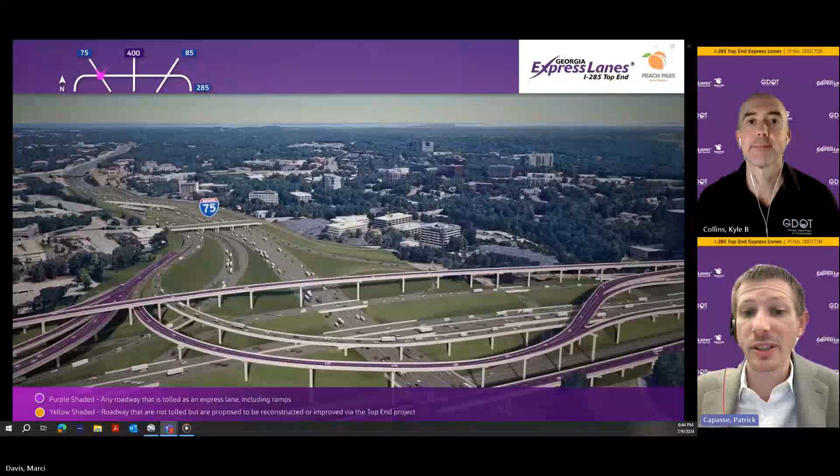So really just utilizing a lot of the existing infrastructure that's out there, not a lot of modifications to the Northwest Corridor lanes themselves at all, Kyle.

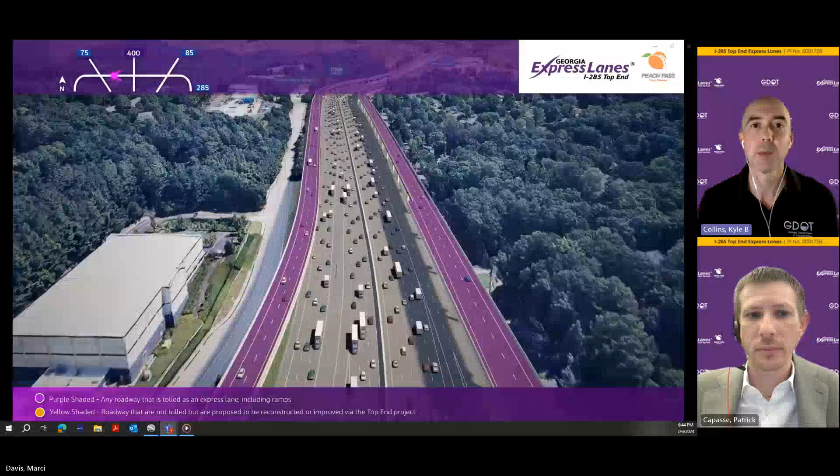Right. And Patrick, folks are seeing a major system concept on the screen, and you're part of the team leadership that helped get it to this point where we could showcase these design files to the public. Maybe just talk about that process. I know it's been several years in the making to get where we are presenting this latest design layout, with a lot of stakeholder engagement, different feedback, and trying to mitigate those impacts. Maybe at a high level, go through what that process has been like for your team.

Oh, it's been a lot of fun, to be honest, with everybody. It's been a pleasure. We've had the opportunity to coordinate with all the jurisdictions along the corridor. All the cities and counties have played an integral role in us getting the project coordinated.

We started from just sort of lines on a page, just starting to see what it might look like. As you meet with stakeholders, and we went to the public in our PIOH event 4 years ago, just to get it to this point has been really rewarding for my career, and also for our team.

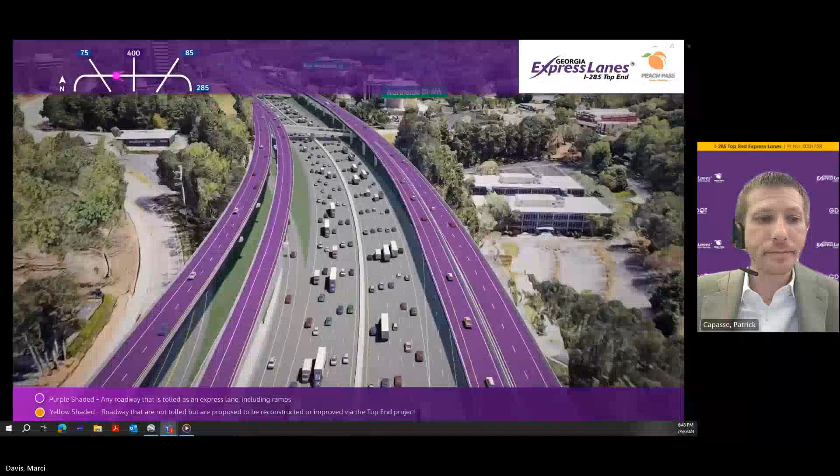Thank you, sir. Appreciate the hard work.

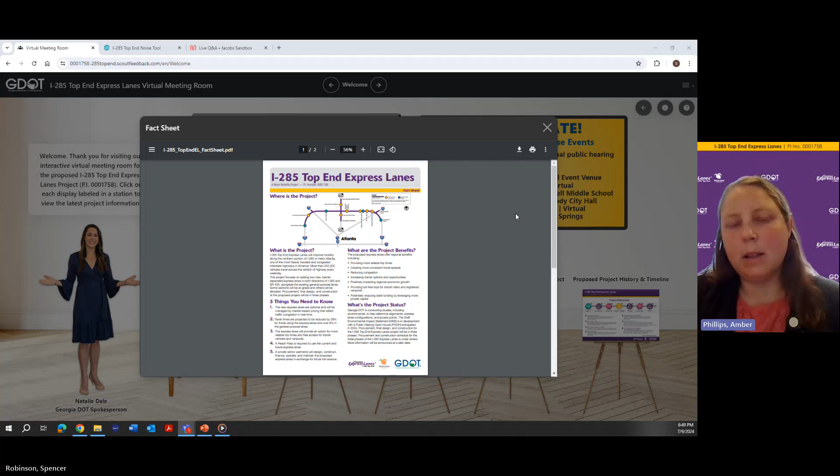Before, you would have to go to only our in-person events. So we're very excited to be able to present virtual meetings like this, or even for those that can't attend, if you have neighbors or friends within the corridor that can't attend these live virtual events or our in-person events, they can still go to the website and access all of these materials via the meeting room. We also have additional materials outside of the meeting room, and those will stay up and remain. Even after the hearing series is over, if people are interested in checking out the noise tool, that will still exist on our website.

We're just really trying to continuously make improvements to this platform. So as a result of this process, we definitely want you to provide comments on the project. Also, if you notice anything you'd like to see, even if it's continue doing something or change something, any recommendations for the process, whether in person, virtual, or the meeting platform, we would ask that you guys comment. We do take that feedback into consideration.

Some of the past feedback we received from the public is what led us to doing this type of platform on the website, and we're continuously looking for ways to improve that. We're very excited to offer the virtual meeting room on this project, and hopefully that answers most of your questions, especially if people are unable to attend during the times we are having these types of meetings and our in-person meetings. So we want to thank you all for coming to the meetings, even if it's just visiting the website. Thank you so much, Kyle.

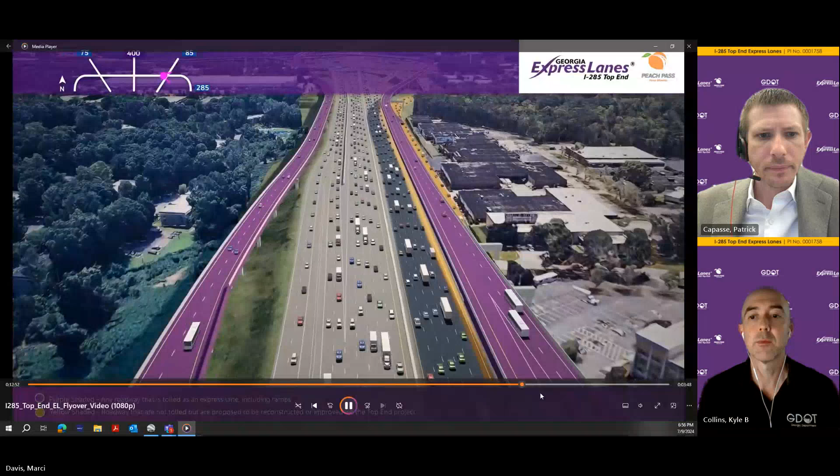Yeah, that's an excellent place to start. Kyle, if we back up the video just a smidge. Now what you see on the screen here is the Spaghetti Junction. So you've got both express lanes on each side elevated to the outside. We are going to be adding 2 additional levels to Spaghetti Junction, so we'll have a couple of new noodles, but there'll be a connection to the I-85 hot lanes to the north. As the camera pans in, we'll be able to zoom in on that as we move up that way.

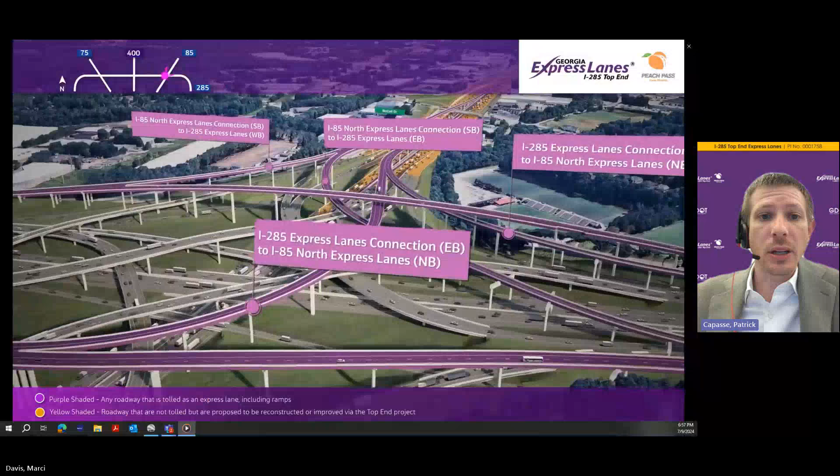I-85 is going to need to be widened a little bit in order to accommodate this tie-in, so we've accounted for that in our environmental document as well. There's a little bit of additional right-of-way required through here, but the express lanes will come down and tie directly into the hot lanes.

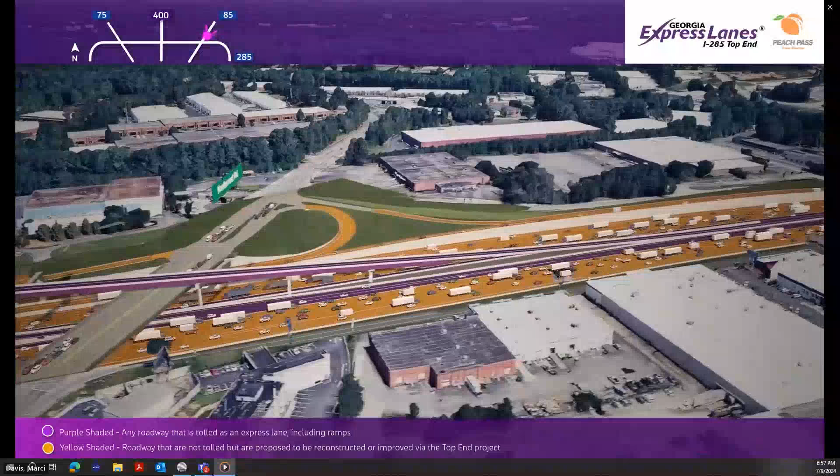And then as we head, the camera will pan south here and we'll get a good view of the interchange as we head back south. The existing express lanes on 85 will stay in operation after the project is constructed, and users will be able to seamlessly drive from one system to the other without having to exit into the general purpose lanes.

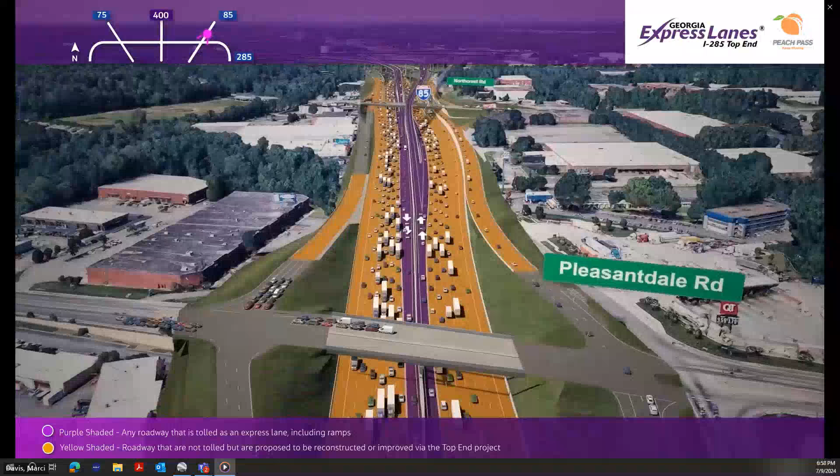Here we are at the northern end of that limit looking south on Pleasantdale Road. The southbound direction of the express lanes will go up and over North Crest before splitting east and west. The camera's going to head towards the east here, towards the eastern terminus of the project, and we'll go over Chamblee Tucker in just a second.

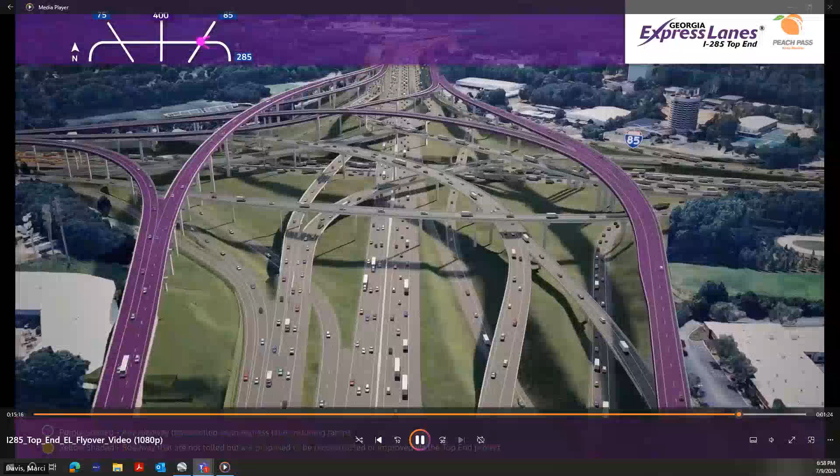And then once again, just another aerial shot of the future Spaghetti Junction. Then the camera will head eastward, still elevated on the outside. A couple of straddle bents throughout here in order to reduce impacts through the area, so we're not completely taking everything along the frontage. Up and over Chamblee Tucker. And then at this point, the project starts to decrease in elevation and head south.

And then we'll tie into the proposed express lanes on the east side. Kyle, here's your tie into the existing general purpose lanes.

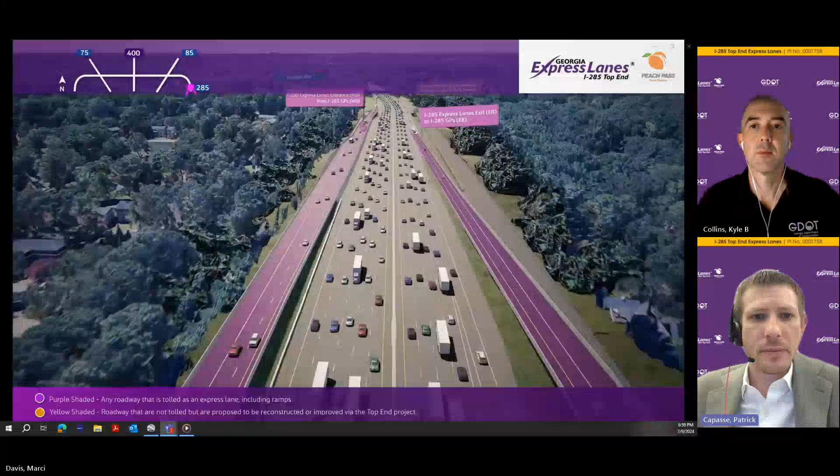Appreciate you closing us out on the design front, showcasing some of those tie-ins for the top end express lanes. I know y'all worked really hard on that design. Got a few seconds left.